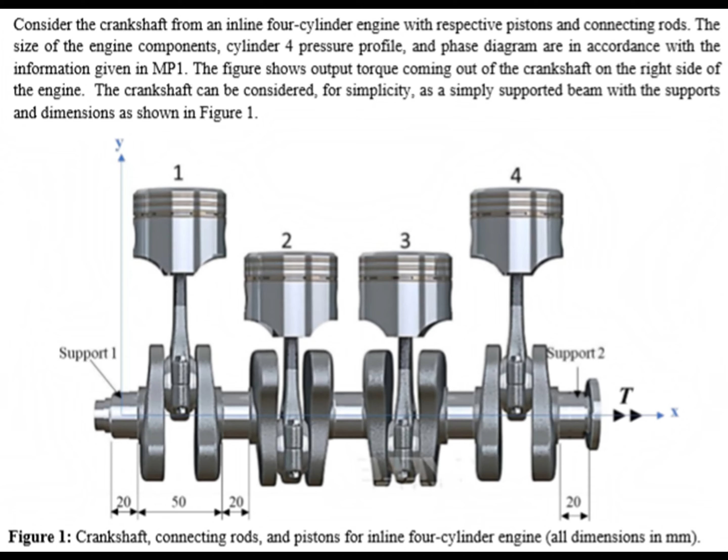A four-stroke engine is a very complex machine. The mechanic process of a four-stroke engine at its simplest form is a piston moving up and down, and this up and down motion turns a shaft that turns the engine. The engine turns extremely fast, so very precise timing is needed for an engine to work best.

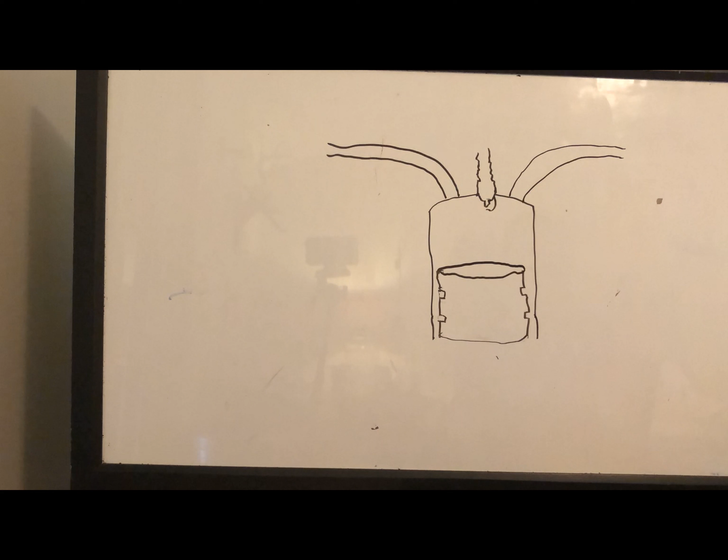To accomplish this, a four-stroke engine is divided into 4 different repeating steps or strokes, hence its name. The first stroke, the intake stroke, is when the piston is moving down and the inlet valve opens up, and using the suction from this downward motion, the piston sucks air and fuel into the cylinder.

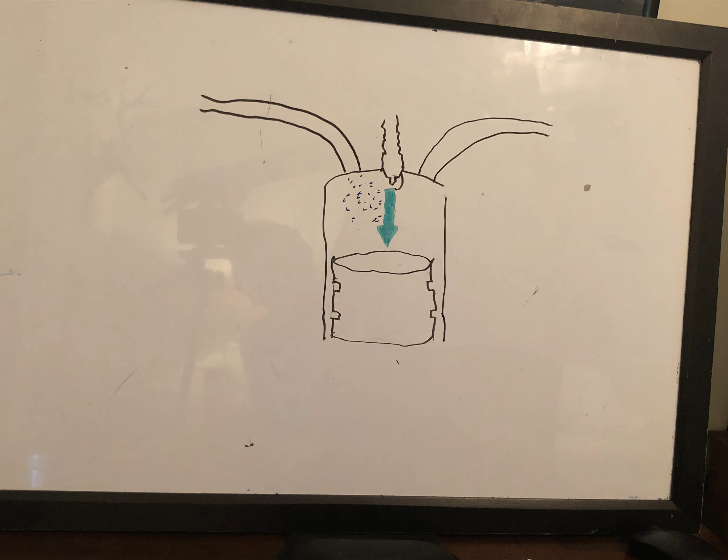The second stroke, the compression stroke, is when the inlet valve closes and the piston moves up and compresses the fuel and air mixture, which heats it up.

The third stroke, the power stroke, is when the spark plug produces an electric spark that ignites the fuel, which combusts and forces the piston down. The spark plugs are activated by the distributor, which consists of a rotating arm with a contact on it that touches another contact which is connected to the spark plugs.

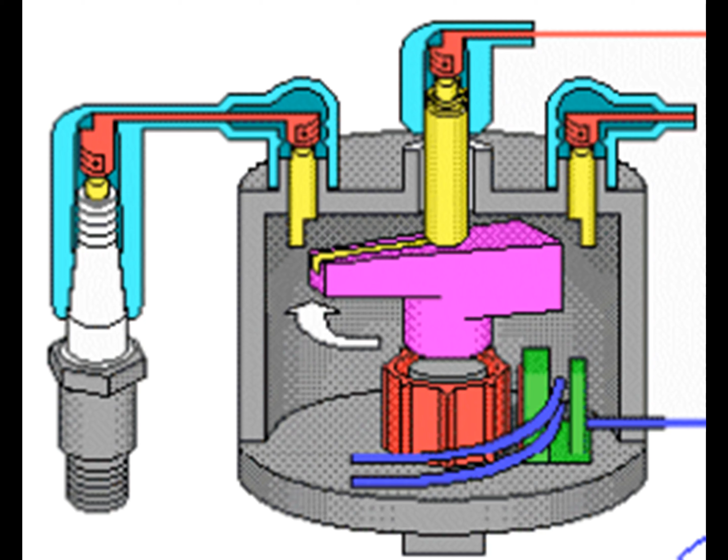The fourth stroke, the exhaust stroke, is when the exhaust valve opens and the piston's upward motion forces out the exhaust. Next, the piston moves down again and all 4 strokes are repeated.

A 4-stroke engine is typically 4 or more of these cylinders going through these steps, and the combined power of all 4 of these cylinders turns the crankshaft, which is where the engine's power is routed.

The crankshaft is connected to the camshaft, which via a timing belt opens the intake and exhaust valves at the right times. The camshaft is also connected to the distributor, so the spark plugs ignite at the right times as well.

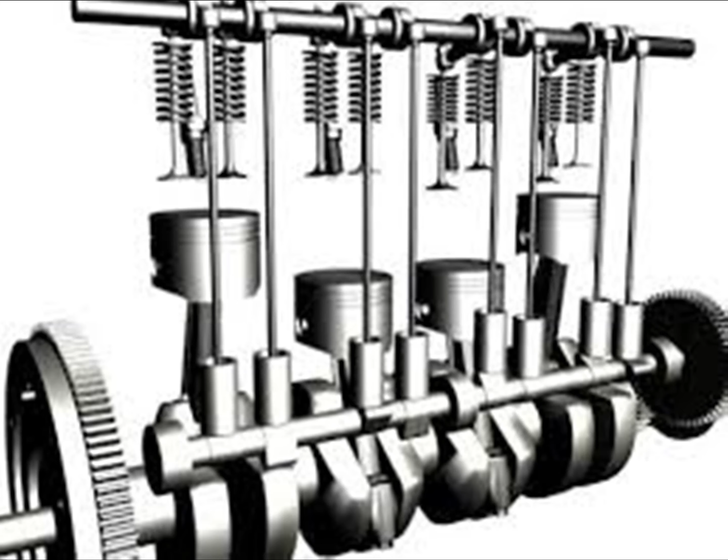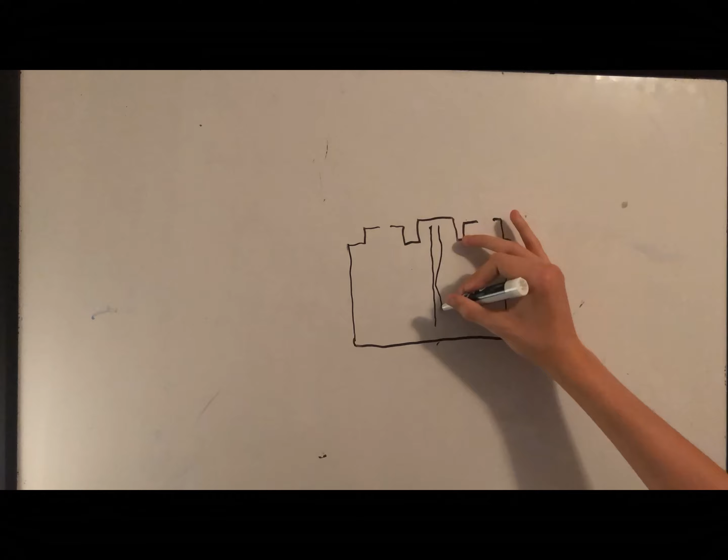Attached to the crankshaft is the flywheel, and this massive gear is instrumental in the process of starting the engine. When you first start a car engine, a hefty electric current is used to power the starter motor, but you cannot run such a strong current through a small key or button ignition.

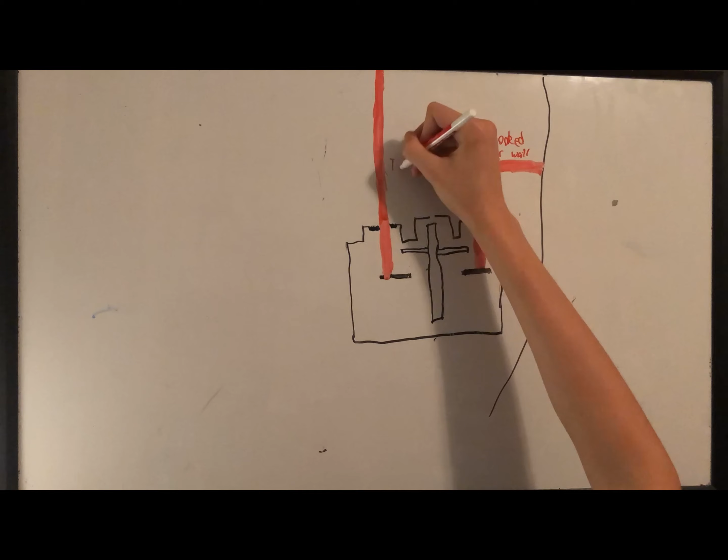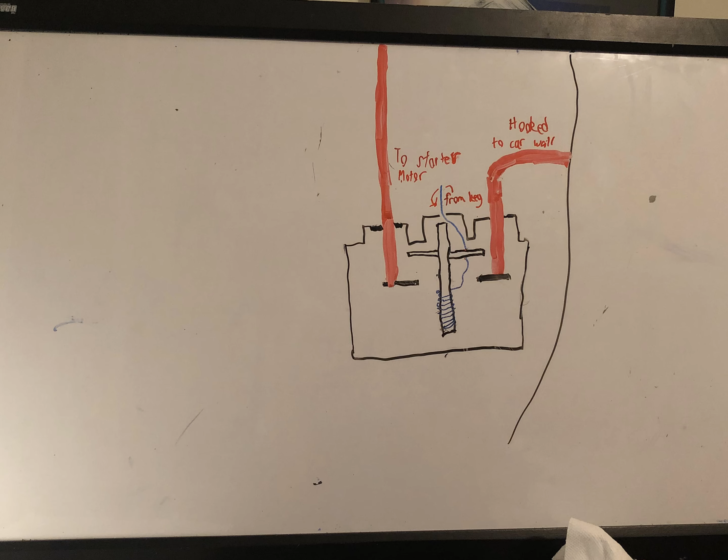When you first turn the key or push the button, it sends a current to a solenoid. The solenoid is made up of 2 contacts that will open the circuit to the starter motor when they're connected. The current from the key or button is used to form an electromagnetic coil that pulls a connecting rod over the 2 contacts, which will open the circuit and the starter motor will begin to turn.

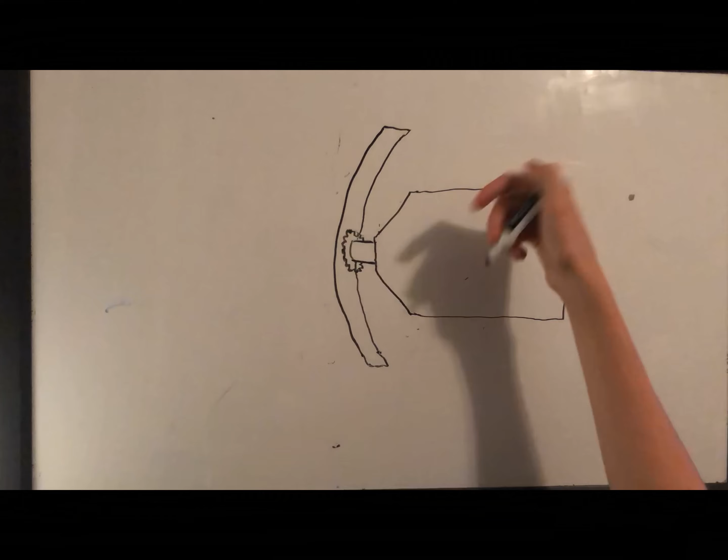The starter motor is a large motor that spins a small gear that spins the flywheel. When the engine begins working without the starter motor, the flywheel will begin turning very fast and the small gear will need to disengage from the flywheel.

Because of this, the small gear is mobile on the starter motor's shaft. The shaft has grooves on it, so when the current from the solenoid turns the starter motor's shaft, it forces the small gear outward and it connects with the flywheel and turns it.

Likewise, when the 4-stroke process begins and the flywheel is spinning on its own, it will be spinning much faster than the starter motor shaft, so this will push the small gear back down the starter motor shaft and it will disengage from the flywheel. After this, the engine is completely started.

Starter motor mechanisms have been used since the early 1900s and are still being used today. However, with climate change becoming a large issue, electric cars will soon phase out gas engines.

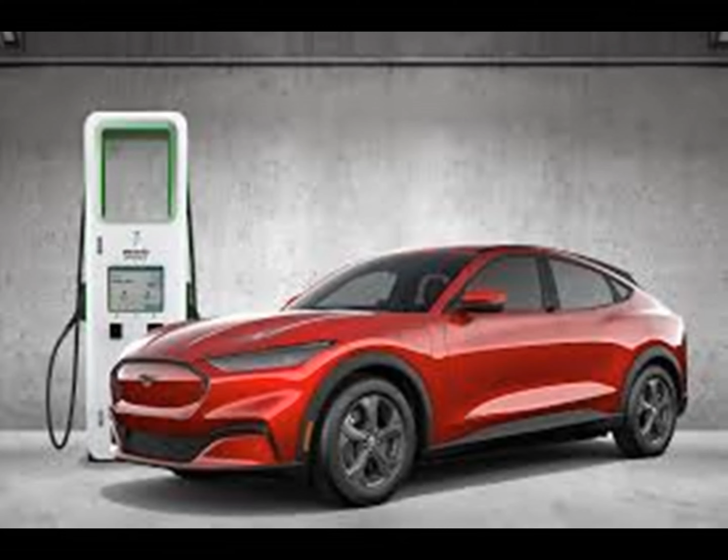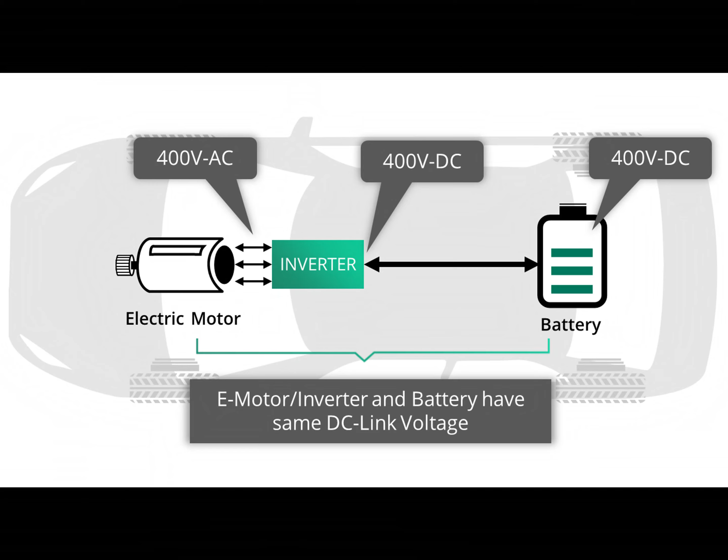Electric cars are much simpler than gas engine cars, with most of their mechanics being 1 or more electric motors connected to the wheels of the car. Starter motors are not required for these cars, so they are beginning to become obsolete to make way for the future. Thank you for watching.